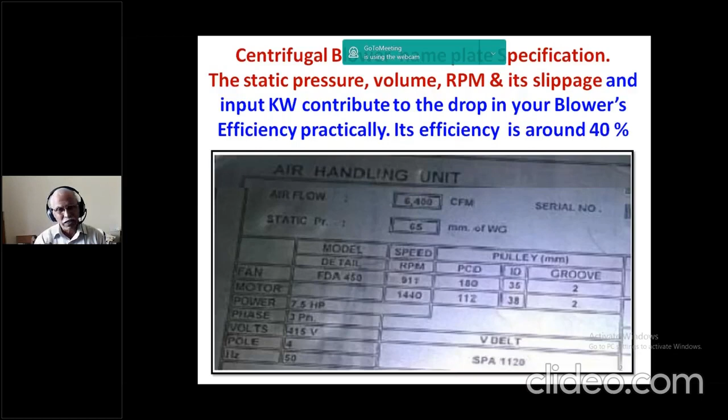This is the study based on Pascal monitoring. Pascal monitoring is related to the RPM of the blower, the Pascal, the flow, the input kilowatt given by the motor, and the fan absorbed kilowatt at the fan shaft. All these aspects will come into it. We will go in depth on this.

So it's a question of revisiting the basics of blowers. Wherever we find the commissioning report, we have commissioned say 20 or 40 fans, let us say in a textile mill or any other industry with dust collection blowers. These dust collection blowers in engineering industries, or in the HVAC segment, we call air washer units or air handling units. Everywhere the blower is the same, but the application is different, so the names are also different. In the HVAC segment, we call it an air handling unit.

If it is the case of maintaining the premises at different RH and temperature, there we call it an air washer unit. And if it is the case of a foundry or an engineering segment, we call it dust collection. The dust in the premises, in the equipment, has to be collected and blown out. So dust collection or automatic waste collection blowers in textile mills or foundries, these are used here.

Let us try to concentrate on a given blower. What does a fan performance curve say, and what does it need? What are the inputs on the x-axis and y-axis of the fan performance curve, especially on static pressure, flow, RPM, and ultimately kilowatt.

The total fan efficiency is ultimately what is deliverable from the fan, in meter cube per second. Let's say it's used in the air circuit only, where air is the medium of flow. The air, in meter cube volume per second, and the total pressure in water column.

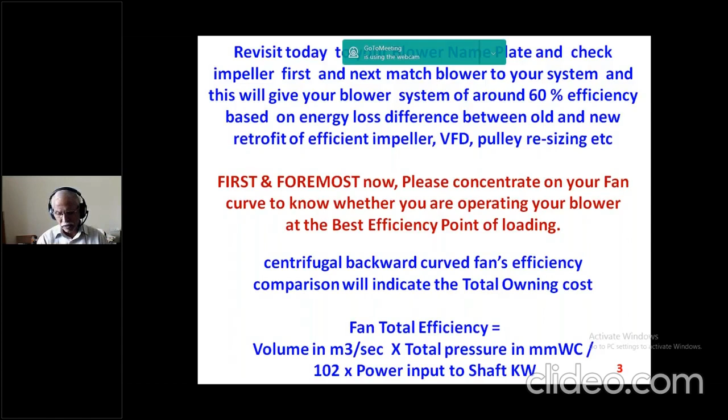A typical 5 HP blower - you can see this Sankey diagram for the given blower. The Sankey diagram is the energy flow diagram for the blower. Input is almost 3.7 kilowatt, that is 5 HP. Motor efficiency is around 90%, drive is around 94%, and the fan is around 70%. Ultimately, 1.5 kilowatt, say almost 2 HP, nearly 40% is lost in the form of heat only.

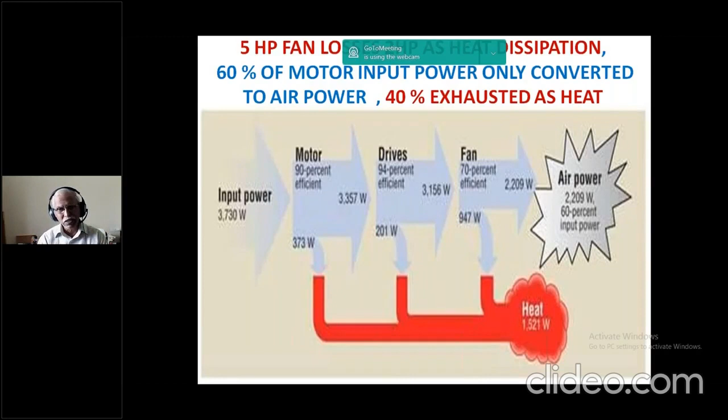When air is being compressed, either in a blower or compressor, the heat of rejection or heat of compression happening during this process is a gray area - whether that waste heat should be recovered, as Dr. Nagesh was discussing regarding waste heat recovery, especially on compressor heat. That's one aspect. But how much we can reduce the waste so as to increase the output of the blower - this is the aspect we are trying to discuss here.

If you take up a breakup of the system, the multiplication of the efficiency of each subsystem gives the total efficiency of the system. Here we find it's a 55 kilowatt textile mill waste collection blower. I'm concentrating on different case studies - it's a waste collection blower.

This waste collection blower is a centrifugal backward curved fan, but the type of blade given in the blower is only flat type. So automatically the efficiency of the impeller itself is around 60% only. VFD efficiency is almost 98%. The motor efficiency at 55 kilowatt is around 90%, and the belt, bearing and pulley here have an 8% loss.

So totally, the system efficiency - we have to concentrate on the system. We have to focus on the system efficiency, which is only at 50%. Now, replacing the existing impeller in the system straight away improved it by 20%.

From a flat profile, we have gone for an inclined profile and curved impeller - centrifugally backward but curved impeller - and it is almost nearer to the airfoil profile, almost 20%. You can see the losses in all the subsystems.

VFD is at 98%, motor at 94%. It's an IE3 motor which gives 94% efficiency at 55 kilowatts.

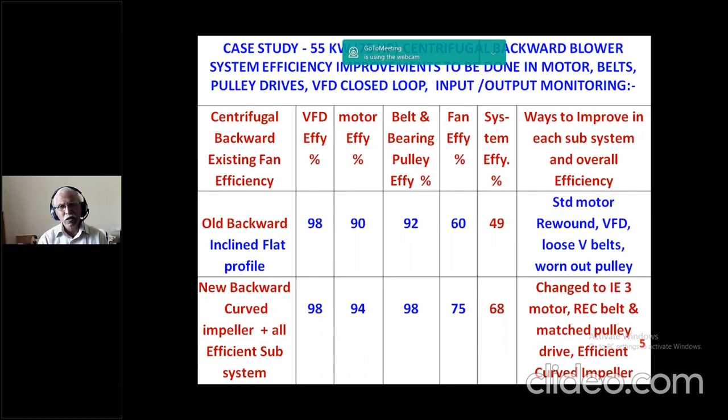This is the area we wanted to concentrate on in the industry. Wherever replacement is needed on existing inefficient subsystems, it has to be done, or a retrofit has to be done, to achieve a better efficiency point on the fan performance curve.

There are two schools of thought here. There's the energy conservation aspect for a given industry - on the existing fan, what can be done? Replacing the impeller, retrofitting a VFD, or improving the resizing of pulleys and belts. These areas can achieve almost 30 to 40% improvement.

Whereas some industries, the green building industries, go straight away for EC fans. The existing retrofit or replacement of subsystems might cost less than a lakh, whereas the EC fan replacement costs more than 4 lakhs. The initial cost is much higher - it is a total replacement.

But here we are not comparing apple to apple. An EC fan, an electronically commutated fan - instead of a 15 kilowatt, 20 HP fan, they will have 4 fans maintaining almost the same output. It's a cascaded efficiency of the fan - 4 sets of EC fans operating as one single fan. That's the new concept coming up.

But typically in India, we always think about what can be done on the existing system to improve it. So the EC fan has, in fact, exposed the energy losses on existing centrifugal fans, and these losses are around 30 to 40%. This can definitely be improved upon, and we will see how efficiency can be restored.

The motor's torque and the load torque - this GD squared value of the given load - has to be optimized and matched to the motor's rating and capacity. This is the crux point in this blower efficiency discussion.

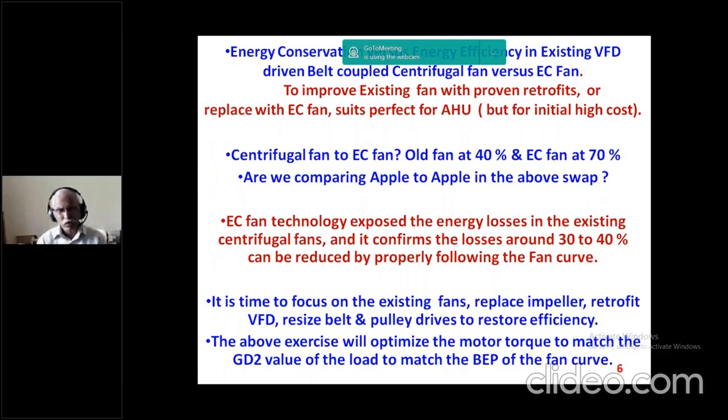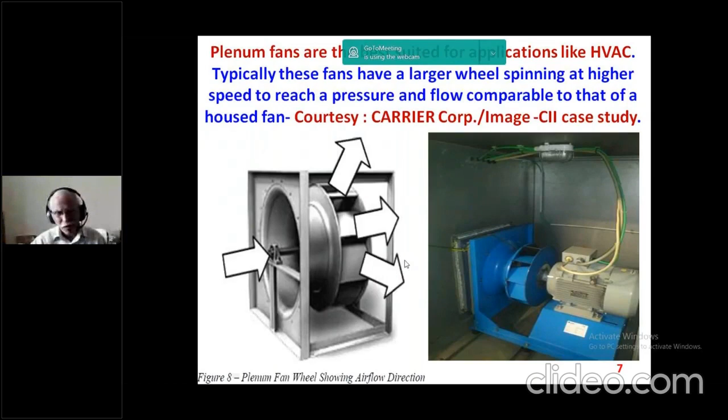You can take the impeller. As I was telling you before, the impeller is an inefficient aspect of the blower building segment, whether it's a forward curved or backward curved fan. If that is replaced - I'm having some video, there's some network issue, I'm just switching off my video, please.

If you replace the existing impeller with a plenum fan or a plug fan, this is an excellent fan - more or less like an airfoil fan, but without the outer casing. It operates excellently at high volume and low pressure, delivering almost excellent efficiency. We will see this in depth.

That is what the CII case study, or the Carrier Corporation, says. We can replace the existing blower with this plug fan or plenum fan, and automatically you can see an efficiency improvement of more than 20%.

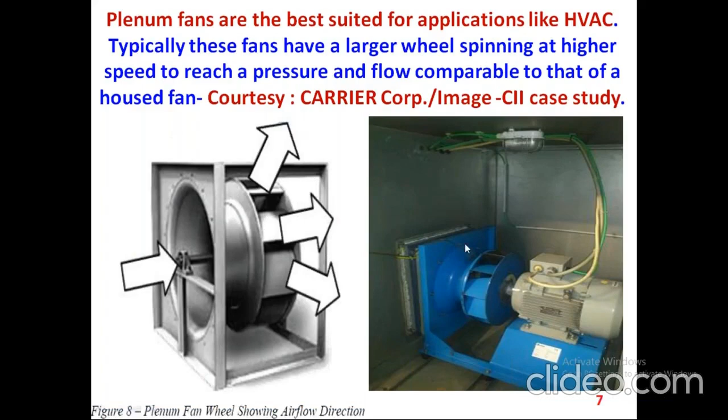Thanks to this Carrier air conditioning case study. This is a fan delivering 25,000 CFM at almost 5 inches of water column, almost 125 mm of water column, 1250 pascals. That is the deliverable pascal from the fan as such.

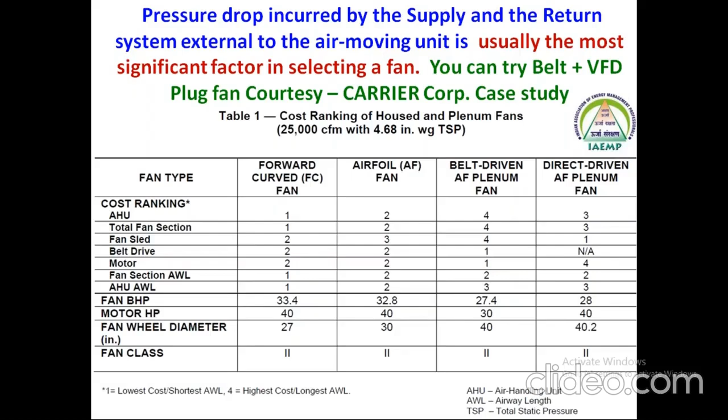The motor HP wanted for this application: normally all the fans want 40 HP except the belt driven plenum fan which needs only 30 HP. So straight away you can save on the inventory, you can save on the motor capacity, you can save on the switchgear capacities. Ultimately, the rated capacity may be 40 HP, but the running BHP is only around 27. This much of energy saving is possible. We can try this on this VFD coupled plug fan study, and definitely this can give almost this much of savings.

To identify the savings and to monitor the savings, to achieve the savings, we have to monitor this. In any waste collection plant, industries have become very much active now, especially on the monitoring. They are collecting this LED based 1 foot by 1 foot display placed at a height of 14 feet.

The whole department can monitor what is the Pascal. This is on a textile mill waste collection system. They are able to see on the header what it is - it is almost 1000 Pascal. And what is required at the machine end is only 600 Pascal. So how much saving can be done here?

So digitally, in situ measurement can be fixed like this type of header monitoring, or with a portable kit - this testo type or any branded portable meters are available. It can measure in terms of Pascal, and you can say what Pascal you are monitoring at this fan, at this capacity. Coming to the static dynamic pressure in the piping, this is the main point apart from the flow we are discussing.

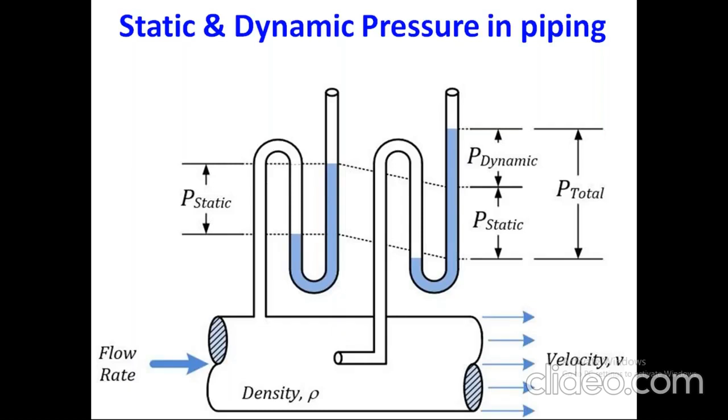This Pascal is more important not only in engineering industry or textile industry or any other industry, but it is very much important in the HVAC industry. Because of this COVID situation, the indoor air quality is more important, more critical now. If the blower is getting choked - that is, the HEPA filters, high efficiency particulate filters used in the blowers are getting choked - automatically you will find so much pressure drop will happen across the blower.

The pressure drop, the pressure will build up across the blower, meaning automatically the flow comes down. So the monitoring of pressure across the HEPA filters, across the filters in the blower, is more important to achieve better changes within the air conditioned premises.

If the blower is not pumping air at the required static pressure, straight away the staleness or the air sickness comes in, and automatically the IAQ of the given department - the CO2 monitoring we are maintaining around 900 to 1000 ppm - that definitely comes to a problem, that definitely shoots up. So ultimately, the static pressure of a given blower is more important in the HVAC segment as well. That is to be monitored as such.

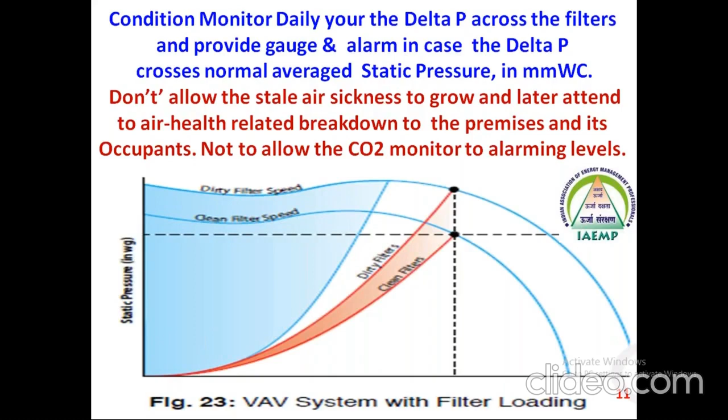I am just trying to share existing case studies where we have done almost hundreds of audits in the building segments and the industry segments.

This is a fresh air fan duct kept on the open terrace of a building, a hospital building. You find so much blockage in the HEPA filters. Ultimately the airflow is being sucked by the fan. The suction pressure or vacuum pressure measured by the fan is only the static pressure in Pascal, and that will be dropped. What is there in the atmosphere is not able to be sucked by the fan because the filters are all choked.

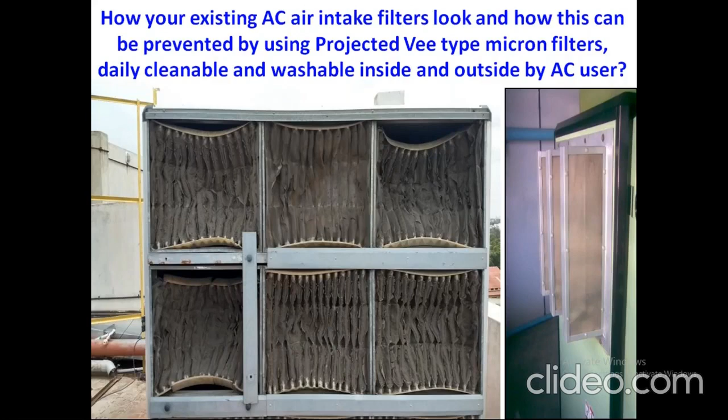This is where we suggest to the industry or building segments to go for a pre-filter, daily cleanable and washable, with an SS Netlan type pre-filter and a PU type mesh filter to clean ahead of the existing HEPA filter. It has to be maintained daily. As long as you maintain the pre-filters daily, the internal conditioned premises' RH, temperature and air changes, and the internal air quality will be well within the normal limits and norms.

Technically speaking, the fan performance curve shows the system curve with the system effect. The OEM gives a fan curve with a system curve which shows what is designed and what is calculated.

What is calculated is that at almost 10 inches of water column, we get almost 14,000 CFM. But when the system resistance or static pressure increases due to narrowed ducts running from the main air conditioning chiller and blower to the end of the conditioned premises, the static pressure increases. Instead of 14,000 CFM, it can deliver only 12,000 CFM at 14 inches water column. So this drop from 10 to 14 inches is because of the static pressure drop across the filters.

This is an area which can be handled with IoT monitoring also. Thanks to Sunil Chhatre, he has given an excellent macro view of IoT, showing wherever it can be embedded in existing systems, either in hospitals or hospitality segments like hotels. These devices can prompt the user, the manager, or the energy manager to take immediate action instead of waiting for a breakdown, so he can take corrective action immediately.

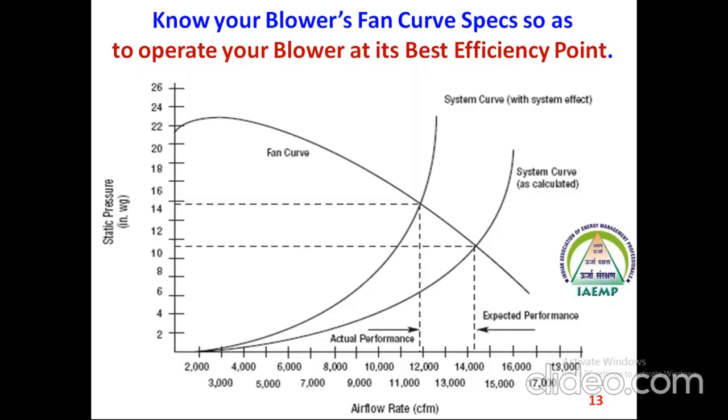Coming to the Pascal discussion, it's a slightly deviated topic, but still important. Charity begins at home, and likewise conservation, or LPG conservation, also begins at home. This Pascal monitoring, especially in industries, can give straight away 20 to 30% savings on variable torque loads, and this is possible at home too.

This static monitoring can even be done in your college kitchen. You take a T connection from your LPG cylinder, and into that T connection you insert a Pascal gauge. Normally, after the regulator, the LPG is supplied at around 280 mm of water column pressure before it gets pre-mixed with air and goes for flame. I'm talking about the domestic LPG cylinder here.

This pressure is not fixed or steady. When the cylinder is full, it almost goes to 3000-plus Pascal, and when the cylinder goes empty, the liquefied petroleum gas vapor pressure automatically drops to around 2200.

Thanks to this retrofit device, I went for a two-stage regulator. What we do at home can automatically be done in colleges or in industry too — energy conservation begins at home only. I did this about 7 years back. The government gives an annual subsidy quota of almost 12 cylinders, but I have been maintaining with only 6 cylinders since 2014.

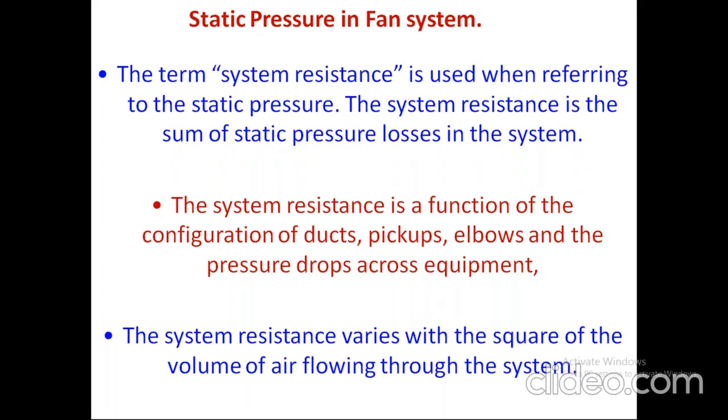For existing centrifugal type fans, what energy conservation measures can be done? Choosing the right type of impeller for the given fan. When you go to the industry for energy audit, tell the industry to open the cover to see what type of impeller it is, how it is made, what is the MOC, the material of construction, whether it is centrifugal backward, forward curved, radial type, propeller type, or aerofoil type impeller. All these inputs will definitely show where is the scope for energy saving.

Then reducing the system resistance. In many textile mills, instead of the T&D losses I was telling in the previous session - the transmission and distribution losses - whatever is generated in the air conditioning humidification plant is not delivered at the end point because the duct loss is more. Many air conditioning humidification plant vendors improved the ducts - instead of an ordinary GI duct, they went for an FRP duct, a circular type duct at a bigger size. Automatically the system resistance dropped down from end to end, and this also improved the total system efficiency.

So we are trying to operate the blower or the axial flow fan - the purpose is the same, though the direction may be different. The axial flow fan also follows the centrifugal aspects of the fan affinity laws, with a dead band. That is okay.

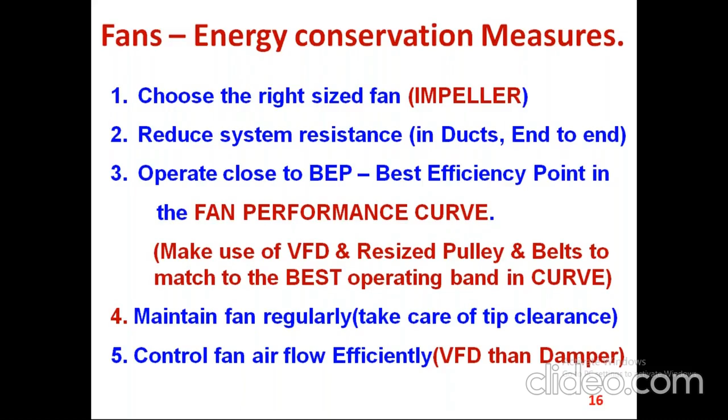So instead of a damper effect, damper is the least efficient, whereas a VFD is the best efficient. Coming to the impellers, backward curved impeller is almost 79% efficient, whereas a radial impeller is 69%. Many exhaust fans use this radial type.

Forward curved fans were used in some HVAC installations before. I'm talking about 10 years back, many old buildings used these forward curved fans, which are at 60% efficiency. If they replace with airfoil blade, especially in the HVAC segment, they can straight away save around 20% just by changing the impeller.

Bureau of Energy Efficiency gives a lot of inputs not only to energy managers and auditors through their guidebooks and refresher materials. These are all points we have to see in the industry, and we have to educate the industry. It's reverse education to the industry, since the industry is always vendor centric and always listens to the OEM. But as an energy auditor, we can also give our inputs to improve the health of the machines in the industry, which ultimately means energy saving for the industry.

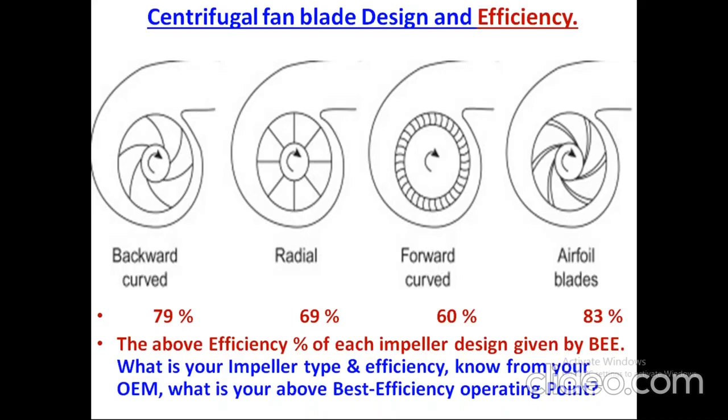Coming to variable torque loads, RPM measurement is very critical, especially for all blowers and centrifugal pumps, whether it's a centrifugal blower or an axial flow fan. At 90% of RPM, say a 1500 RPM fan with a 4-pole motor, if I operate at 1350 RPM, which is 90%, I am able to achieve savings of almost 27%.

The power reduction is 27%, so that energy saving is possible. A 2% reduction of motor speed, subject to the optimum static pressure and flow required by the load end, gives 6% power savings, and a 5% reduction in motor speed gives straight away 14% savings. So VFD coupled with resizing of pulleys definitely increases energy savings. VFD alone can achieve let's say 70% of the possible savings. The balance 30% can be achieved by resizing pulleys and belts, so totally 100% energy savings is possible. Meaning, of that 30%, 100% can be achieved by VFD and pulley resizing combined, whereas with only VFD, only 20% of that 30% is possible.

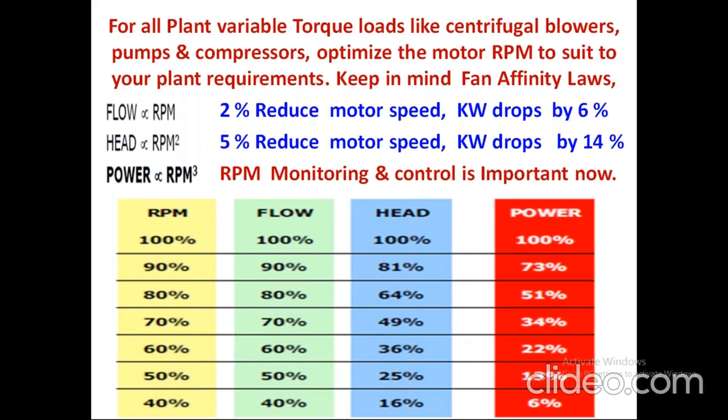It is purely by the resizing of the pulleys and the VFD; the flexibility and versatility of the VFD is put to use in this application, and straight away 35% savings is achieved. It is a critical application, they have to maintain temperature and RH at 22 degrees, especially since it's a chocolate factory where you cannot risk the air changes. But having taken this study, they have been running this for the past 3 years at 35% energy savings, and the factory is still running with air circulation achieved.

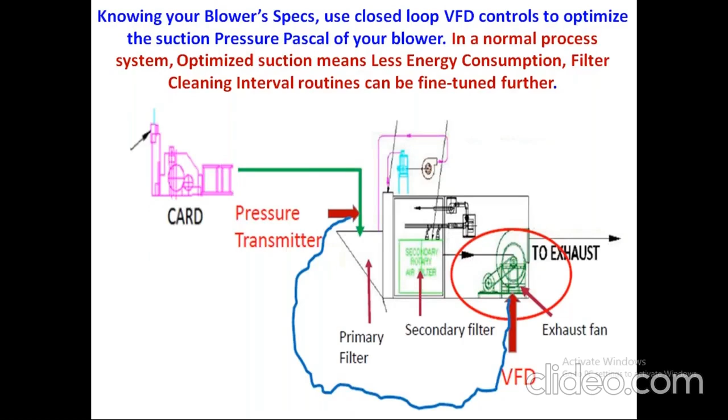How can this be corrected? I'll show you, thanks to this BEE knowledge transfer platform in textile mills, some big textile group has shared this case study. Normally we find the negative pressure required by the machine - the supplier says 600 Pascal, whereas the duct loss here is 600 Pascals more. That is why we always say optimize your duct sizes, make the duct sizes smaller, and reduce all the bends and sharp bends to reduce the Pascal losses. The compressed air kg loss from 6 bar to 7 bar is seen, but the Pascal loss from 600 to 700 or 800 Pascal is not seen by the individual.

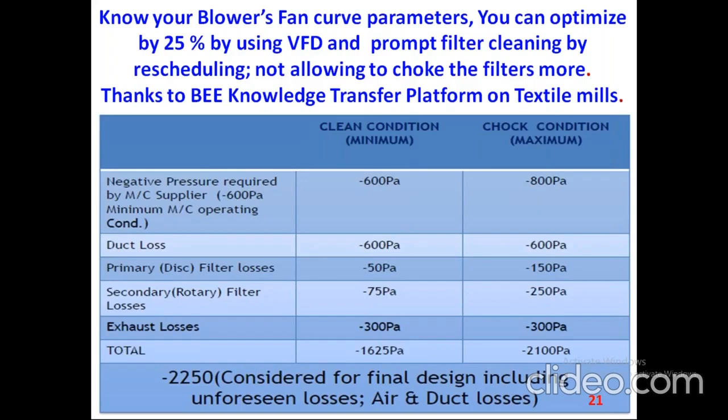This is where we have to monitor the Pascal to maintain this, and we can maintain the same blower instead of 2200 Pascal at 1600 Pascal also. From 2200 to 1600 is straight away 25% possible saving in existing waste collection systems, not only in textile mills but also in foundries on the fume extraction point, and in all the dust collection blowers, especially used in fettling aspects in foundries and engineering segments. This can be achieved as such.

So why is this VFD put to a blower? When the blower is put to recirculation, straight away 100% is the consumption - there is no energy saving here. Whereas if the blower is throttled by a damper control at the delivery of the blower, 70% consumption is there. If it is put on cycle control, switching on and off, that is the best way of control, what we do in our domestic fridge.

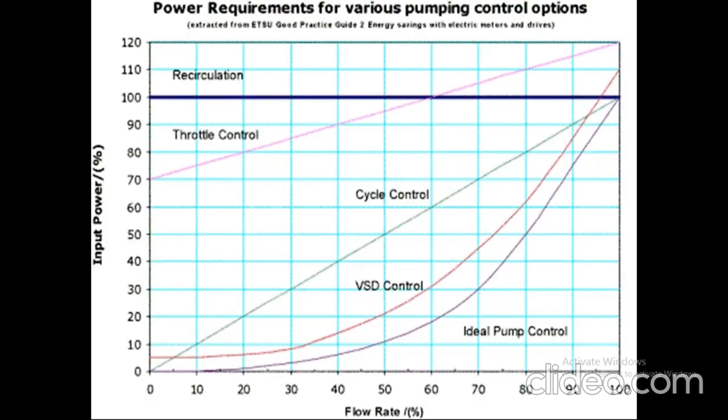This is where also now the inverter type VFD has come for the fridge compressor also. Instead of switching on and off on the thermostat, this inverter still reduces the kilowatt or watt savings in our domestic fridges. Likewise, with cycle control, the VFD control, the variable speed drive, consumes only 10% at the starting of flow rate. Even at 50% of flow rate, this consumes only 20% of input power. At 80% of flow rate, this consumes only 50%. This is the main purpose of putting the VFD on the blower. Wherever, whichever industry has not put it, you immediately put the VFD, and you can achieve savings based on the Pascal requirement and based on the flow requirement from the load end.

Coming to the impeller, what I have been talking about before is centrifugal impellers. This is an axial flow fan impeller. Many textile mills are implementing this. The previous impeller was a gravity die-cast fan blade, which was almost 35 to 40 kgs. This impeller is 1200 mm diameter. This is replaced - instead of an 8 leaf, this is replaced with 18 leaf. Higher the blades, better is the CFM and better is the static pressure. It is a pressure die-casted impeller, replacing the previous one. Straight away, textile mills are saving around 15 to 20% by this swap.

In some textile mills where the plenum size is less, they can go for an aerofoil type FRP blade, where it is not a hollow FRP, it is a thick FRP. Normally, it is glass reinforced FRP - the glass reinforcement will definitely increase the weight of the fan, but the aerofoil profile of the fan will achieve excellent savings, almost 15 to 20% achievable. But the problem with textile mills and OEMs is they measure only the flow. If you measure the static pressure, are you maintaining the same 30,000 CFM at 600 Pascal before and after? If you are able to measure the Pascal before and after, then you are 100% convinced you are getting the energy savings achieved. So kindly confirm this, please.

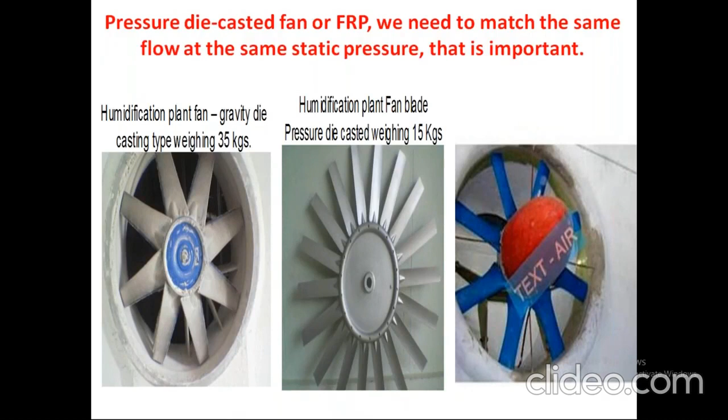Normally, in some industries, like a booster fan, they have two fans in series where high resistance is there, which induces high resistance, and if you want to increase the flow, the static pressure automatically increases when two fans are in series. But in many industrial applications, like exhaust, suction, or air washers, they have parallel fans where the system resistance is low, and two fans in parallel can give an excellent CFM at a very low static pressure.

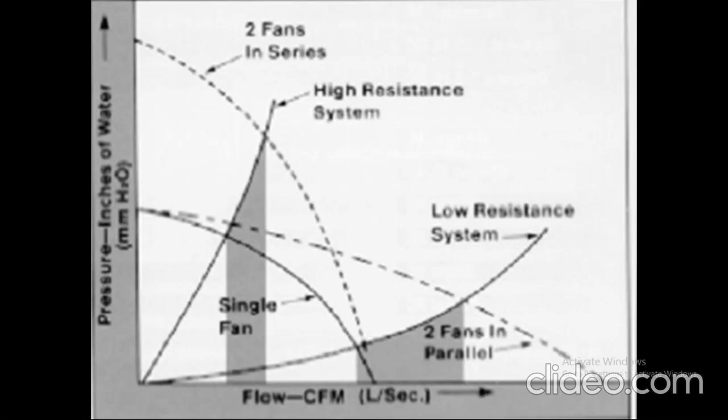Normally, for two fans in series, out of 10 industries maybe only 2 industries need this type of setup, fans in series. But most industries, 7 out of 10, need fans in parallel only.

We can see exactly the opposite, where the fan curve shows the high resistance is not there. So the low resistance of the system improves the operating point of the existing two fans, and ultimately parallel fans are suited to all industries where airflow changes or air changes have to be achieved. In many textile mills, they go for 2, 3, or 4 fans in parallel to achieve this.

Fan performance curve - if you have not taken this from the industry, as an energy auditor you go to the fan performance curve, or you suggest to the industry: whatever fan the industry has bought, don't buy this fan as a commodity, buy the fan performance curve.

This will show the absorbed power of the fan in the top graph, and the static pressure, the mating point or meeting point of static pressure, maximizing the flow and the pressure for the given kilowatt. This is the best efficiency point of the given fan.

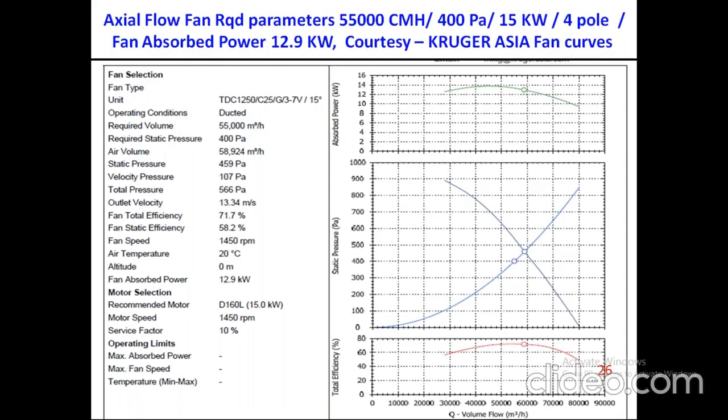You can see the specifications of the fan, it has to be defined. Any OEM, the fan OEM, is supposed to give this fan performance curve to the industry. It is part and parcel of their spec to be delivered to the industry. It is not just a question of delivering the fan, but they have to deliver the fan as well as the fan performance spec to the industry.

That is the aspect of blowers - condition monitoring of blowers, and especially Pascal monitoring of blowers. Energy monitoring in blowers is the last aspect of this. Now let us come to the compressor.

For the compressor also - what is the pressure to be maintained? What is the pressure demanded by the user? What is the pressure demanded at the header? What is the pressure maintained at the generation?

So any air that is compressed contains so much water due to the RH in the premises - say in Nagpur or Ichalkaranji, or in coastal areas, almost 95% RH. Whatever the RH is, it's around 70%, and at night time it's around 90%. The RH is a variable factor, as well as the temperature factor.

So when air is compressed through an air compressor, the water has to be removed in stages. If the water is not removed, it will kill the pneumatic health of the given process. The pneumatic functions will malfunction because of water ingress into the air system. So we have to remove water in the post air cooler, in the air receiver, across the filters - the coalescing filters or water separator filters - and then in the refrigerant dryer. With all these aspects, the water is removed, and the pneumatic health of the system will be excellent for a given industry.

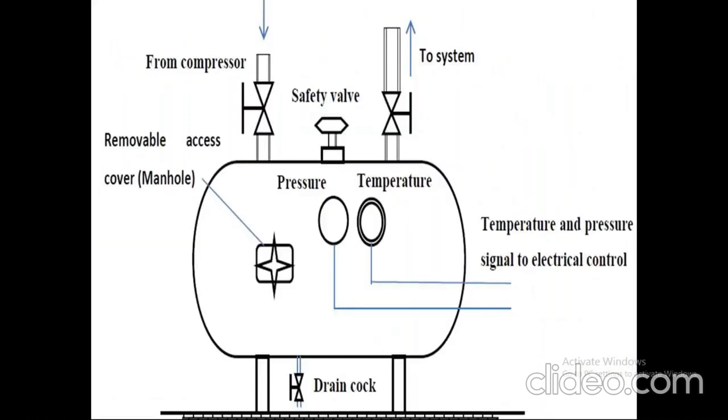And the pressure has to be maintained in the receiver, and being a volume, we are using this. Many of the laws like Charles' law or Boyle's law, P1V1 equals P2V2, for a given PV equals RT. All these gas equation inputs we are using here.

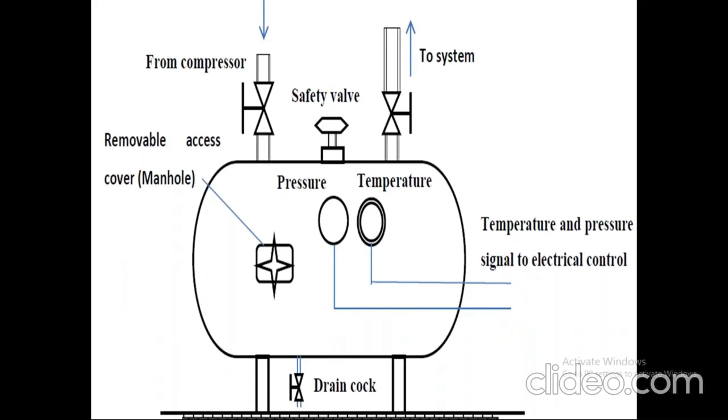Once the volume is expanded for the given pressure from 7 bar, it is given to some 1000 liter or 2000 liter receiver, straight away the pressure gets stabilized within a few seconds. We want a non-pulsating, not a pulsating pressure to be given to the process. We don't want a pulsating pressure to be given to the process.

Thanks to the thermal imager. The thermal imager is a non-invasive portable device where it can study all the aspects. It is not meant only for an electrical room or a powerhouse. It can be very much used in all your process flow, wherever the temperature gradient is changing, there it can be applied.

The level of emissivity is auto-controlled in a thermal imager. In a basic thermal imager, it is getting controlled, and you can measure the temperature of the in and out of any systems.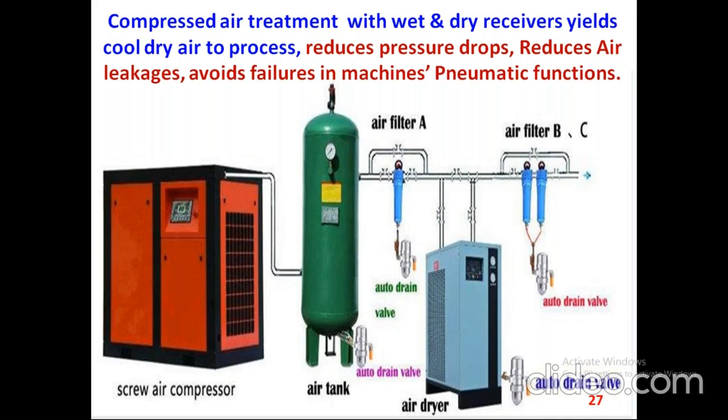Any dryer for the given process, as I was telling you, this is the dryer it is used. It's a 1000 CFM compressor, meaning the dryer minimum those days, one decade back, they were using a 1000 CFM dryer. But now the pressure drop across the dryer is going more, so they are going for a 1300 CFM dryer.

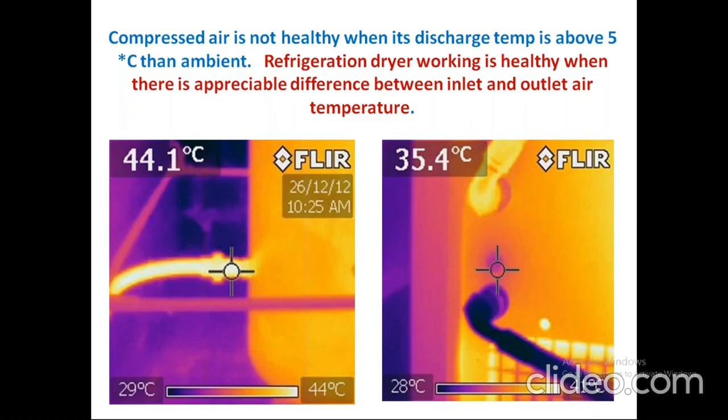Why this 1300 CFM dryer is needed: when the temperature of the air inlet from the receiver to the dryer goes to 44 degrees, straight away the dryer gets derated by 10 to 20%. So that is why we say the air delivery temperature after the post air cooler should be less than 5 degrees above the ambient temperature across the compressor house.

Here the ambient temperature, the house temperature, everything matters to the compressed air flow. Compared to any variable or flow in the process or utility in the industry, compressed air is a dynamic variable where it is fluctuating very heavily.

Normally the compressor OEM says, I am giving a 160 kilowatt machine, it is a 1000 CFM deliverable at that pressure. And the FAD, the free air delivery at the nameplate of the compressor OEM, is stated either in meter cube per minute or in LPS, liters per second of the compressed air. This is following the standard IS 1217.

I will suggest all of us visit the IS 1217 standards to see what ambient condition, what reference they are taking, and what deliverable air reference point they have taken as an OEM. They have taken the deliverable at a temperature of 20 degrees and at a relative humidity of 0.

This is not going to happen anytime, but this is the reference point the compressor OEMs give on their nameplate, say at 160 kilowatt meaning 1000 CFM.

Let us apply, thanks to the best practices, we have to visit the global energy management websites. Lots of inputs are available to the industry, to the academics, to the professors, and you will find many of the inputs can definitely be horizontally deployed to the industry, where the tropicalized condition for an Indian climate can be addressed by the changes happening in the ambient, and that can be corrected.

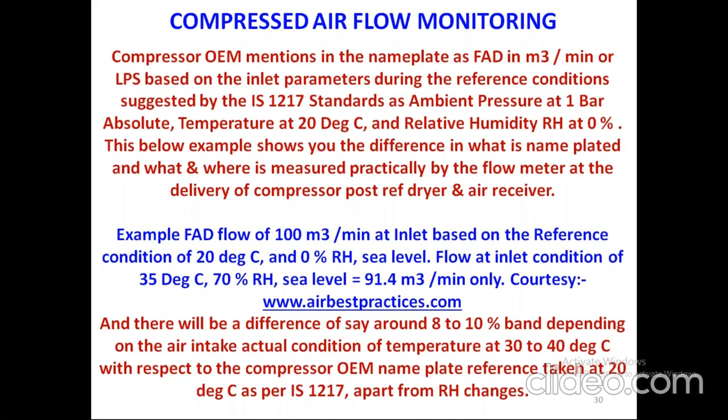So in the compressor, energy monitoring can happen at the generation, at the distribution, or at the tail end. So arresting the leakage is important, because this leakage is not visible. And to make it more visible, the leakage can become audible to our human ears.

Let us say it is a 2-inch pipe with 100 CFM air flowing through it, and it is leaking more than 30 CFM, let's say 30% and above of air leaking on that 100 CFM line. This is audible to our ears. Any airflow or piping flow leak above 30%, above 33%, is audible to the ears. That is our human ears' capacity.

But we cannot rely on our human ears' capacity. We have to go for an ultrasonic imager to arrest the leakages where it is happening minutely. Small drops make a big ocean. What all the EESL, TERI, CII, and everyone talks about is compressed air leakage only. We have to go for ultrasonic imaging to spot the leak hotspots, and that has to be arrested.

You may have an excellent generation compressor which gives almost 0.15 kilowatt per CFM, but still, if you are leaking through the pipes and equipment, it is a big loss to the industry. It is a silent loss to the industry.

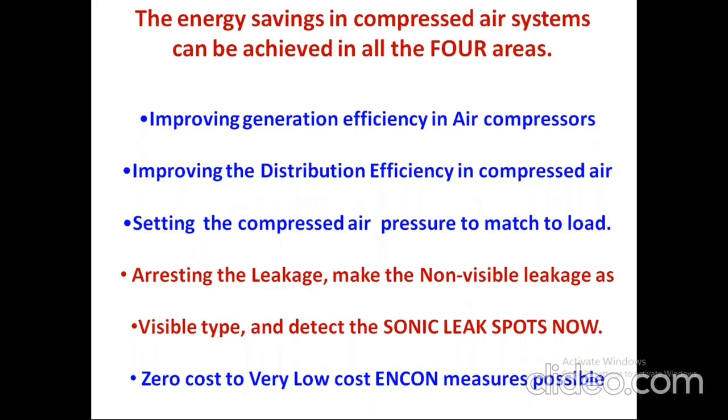Coming to the piping, wherever you find T connection pipings, it creates turbulence. Normally the compressed air velocity is supposed to be maintained around 6 to 10 meters per second in the compressed air header.

In the distribution, it is different, around 15 meters per second, it can come more also. But for many of your compressors on the compressed air header, I will suggest you go for a compressed air flow meter to monitor the velocity, to know what velocity is there.

Because all the GIS pipes, all the MS ERW pipes, electric resistance welding ERW pipes, get totally corroded and scaled inside. Instead of a 4-inch pipe, you will effectively have only a 3-inch pipe inside. Automatically the velocity will go up, and ultimately the distribution loss will definitely increase, and the pressure drop across end to end will definitely increase.

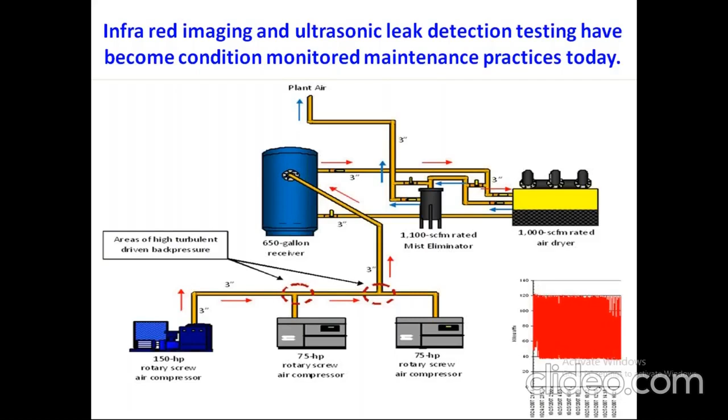Wherever you find a T connection, that is a point of turbulence. In many industries, they have replaced their T joints in the compressor house with conjoining joints. I'll just show you the conjoining joint - this is on the water pipe, but the same thing can be done on an air pipe also. They have to go for 45 degree conjoining bends on the compressed air header. Straight away, it can give a minimum of 5 to 10% savings depending on the turbulence happening at the T joints in the compressor house.

Ultimately, a 100 kilowatt compressor running means only 15% is made useful to the process, and in that process only 10% of the input actually reaches the point of pneumatic amplification, the real pneumatic functioning. So the T&D losses and leakages vary around 30%.

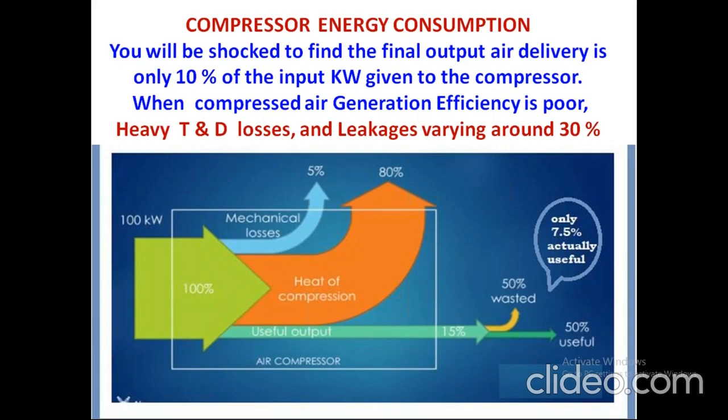It varies from industry to industry. In a textile mill, it is 30%. In the loom sector, airjet looms and other machines, it is around 5 to 10% only. The leakage figure cannot be generalized. Normally energy auditors generalize and say compressed air leakage will be 30% or 50%, but it is not like that. In many industries, they maintain less than 10%. This is a point to note for the energy auditor.

Because of leakages in the compressed air header, on the piping, and on the branch piping at the tail end, this compressor operates from 170 kilowatt to 340 kilowatts. It's a 325 kilowatt machine giving 2000 CFM delivery. Because of the leakage happening in the system, and since they don't have a cleaning air receiver, you can see the pulsations. This automatically affects the electrical distribution and is a big loss to the industry. They cannot afford to have a zigzag flow rate in the compressor; they have to stabilize the pulsations.

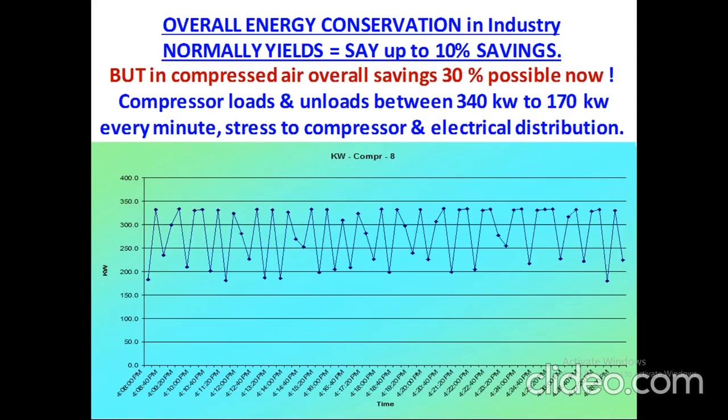We always call it the quarter decay rate. Normally it is a theorem by itself - you go by the quarter decay. Initially it will start with 4 times the amplitude, then it will come down to quarter decay. This quarter decay and non-pulsation condition is mandatory for the given process or industry.

That is why we always suggest, when you go to an industry, to go for 2 types of receiver - called wet receiver or dry receiver, or demand receiver and control receiver. The control receiver controls the cut-in cut-out for the compressor, whereas the demand receiver takes care of the process. This is mandatory, as per the air best practices guidelines. The compressor OEM always suggests you don't go for 2 receivers, to keep compressor efficiency looking excellent, but they find a loophole by recommending only a single receiver at the compressor house. It is a loss to the industry - you definitely need 2 receivers.

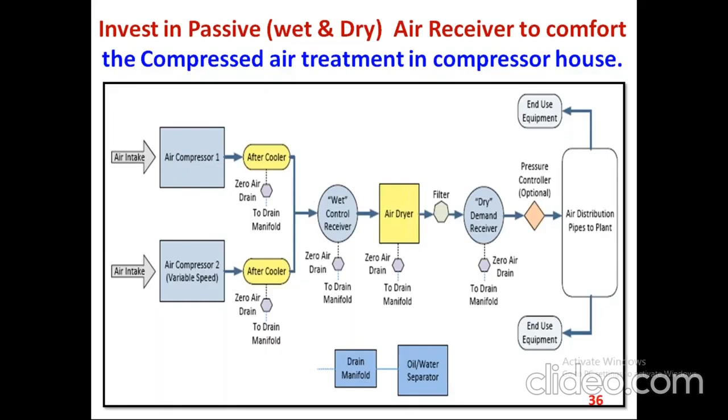That is why I have been discussing monitoring of compressor receiver temperature, water drain at the receiver, load-unload hours, and refrigerator air inlet and outlet temperature. What is ambient temperature? Plus 5 degrees, and ambient temperature minus 5 degrees is the output of the dryer. For pressure drops, you have pressure switches or a pressure gauge and indicator.

Thanks to IoT, incorporate IoT devices end to end on the main header and on the tail ends where heavy withdrawal occurs. When there is a heavy drop of pressure, it means there is unwanted leakage happening, which can then be corrected.

Thermal imaging of piping and compressor parts is excellent, and sonic imaging of air leakage in pipes and tube joints is useful too. At any machine control panel, these pneumatic junction joints have lots of leakages because of bleed valves, non-bleed valves, electro-type valves, and poppet type valves. The leakages are more in the machines than in the header or subheader - you have to look into that, and this is possible only by sonic imaging.

An ultrasonic imager is available; you can use that. It ranges from 50,000 rupees to almost 15 lakhs. Depending on your requirement, you can choose the imager.

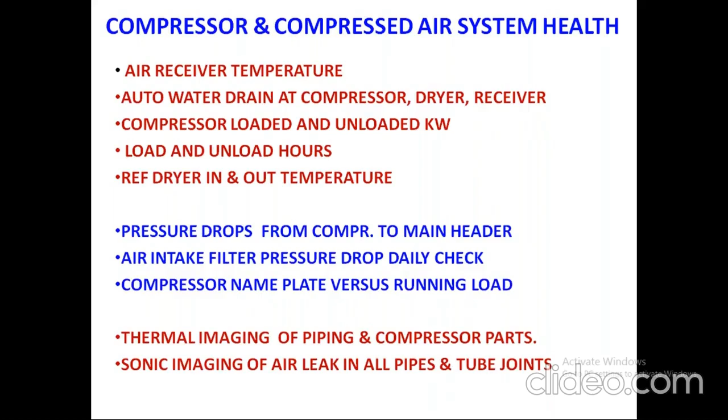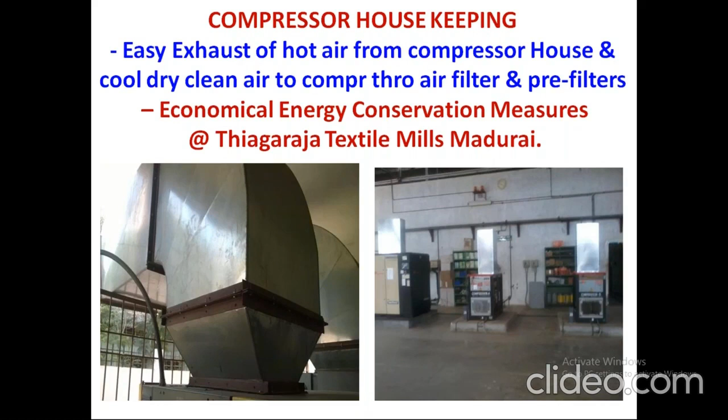What is the reason for heat rejection? As I mentioned before, 70% of the heat is rejected and has to be evacuated out of the compressor house. Where you are doing the energy audit, suggest going for a 3-meter duct on top of the compressor skid. Automatically the hot air is taken to the top, and the compressor's surroundings are kept cool. Some just-in-time measures have to be implemented in the industry's utility to improve energy conservation and efficiency.

Pascal monitoring is possible in each and every compressor. If the energy auditor has not done that, let us do it now. The Pascal meter costs just less than 10,000 rupees. Have that Pascal meter and digitize the Pascal drop, the pressure drop across the filters.

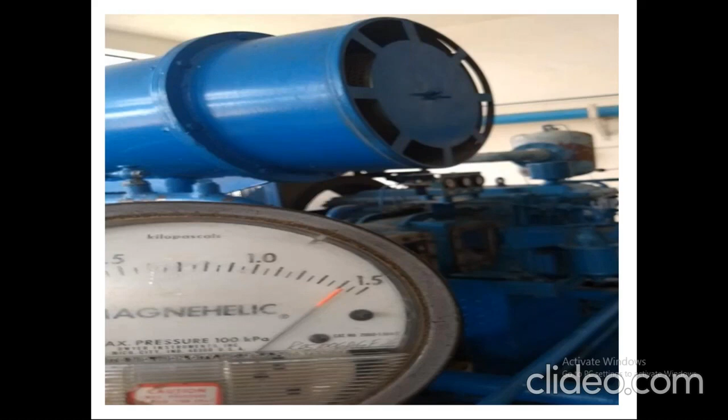This is a BOP compressor, a Kirloskar machine, a balanced opposed piston compressor. Almost 1,500 Pascal is the drop. Normally a new filter has a drop of only 300 Pascal, and here it is 5 times the drop seen in the compressor - this is automatically a loss to the compressor.

That is why one is monitoring the loss across the filter and suggesting the industry go for a V-type filter, 30 degrees V-type filter, so that you can increase the area of coverage of the intake, and you will have a PU mesh to reduce particulate matter in the air. Ultimately, this is daily washable and cleanable in the industry.

And the existing main filter, that is a paper filter, it can run for 3,000 hours. Instead of 3,000 Pascal as the pressure drop, you can maintain less than 1,000 Pascal at the main filter.

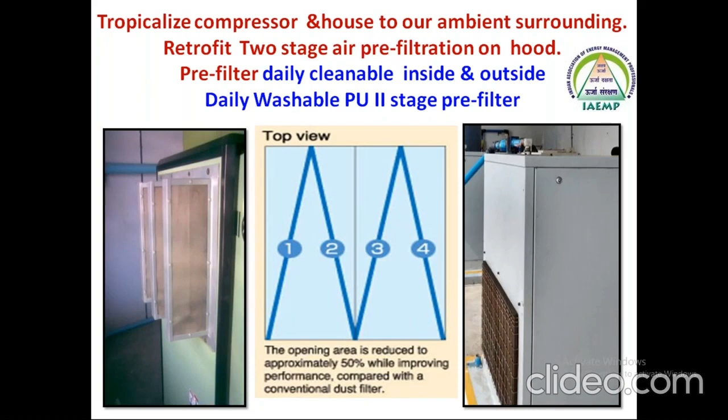Having done the energy audit, we always suggest to the industry, and this industry has done that, they have maintained an excellent V-type filter, pre-filter, and a PU filter inside the hood.

See the shift, this is GHCL, Gujarat Heavy Chemical, the ACC unit in Madurai, they have done this. Every shift the operator just cleans that pre-filter. He sees to it that free air is delivered at the compressor intake always, throughout the period of 10 years.

Pascal measurement - thanks to our Dr. Sanjay, he was mentioning we wanted more inputs on the Pascal. 1 Pascal in 1 lakh Pascal - this is what the compressor gauge shows. It's an imported machine, and this compressor sees the air filter drop around 600 or 700 Pascal only, but it's displayed on a 1 lakh Pascal resolution. So automatically you see only many zeros in the resolution, and ultimately the operator assumes it is perfect.

So try to have a retrofit fitted. Now, thanks to our energy audit, I always suggest to the industry - we have some IoT implementing service providers there. Once we suggested to them, he said, sir, it is available at a cost of less than 10K only. We can provide that air intake delta P filter with a remote alarm at a cost of less than 10,000 only. And this prompts the compressor user to stay within the limit of less than 1000 Pascal, and not allow the choke to go more than 3000 Pascal.

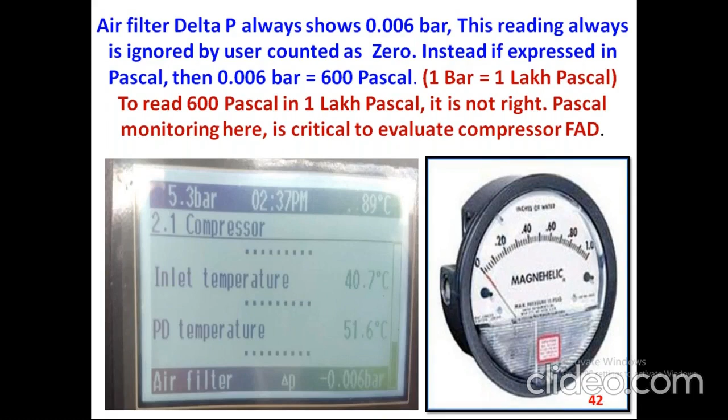We will not go only by the OEM's instructions. We will also aim to be better than the OEM's instructions.

This is our energy auditor's section - this imported machine where the air intake Pascal is not given focus at all. We can see a small vacuum bulb to check if it's choked. We removed that filter and inserted our digital Pascal gauge and measured the Pascal. So instead of that, you put a connection, an impulse connection, and take it outside the hood, and then just leave it like that.

This IoT device will show the compressor is healthy daily - this is what is wanted now. This is a 160 kilowatt machine, and here the Pascal is not monitored, meaning it is a loss to the system. Aggregated loss and aggregated aging to the compressor can happen only because of a starved intake at the air intake.

The compressor usage and leakage - see, normal production needs only 50%, but almost 30% goes towards leaks and 10% towards inappropriate uses. So leakage is a primary focus, not only for the energy auditor.

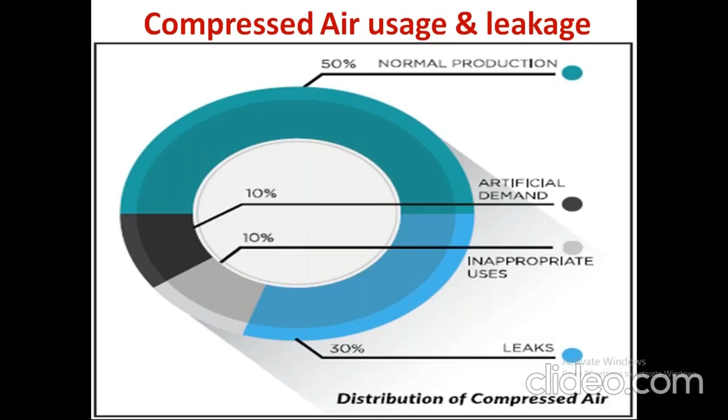It is normally we suggest the industry to outsource the air leakage detection. An outsourced service provider agency will do a better job of finding the total leakage and giving the corrections, and then we can maintain it ourselves.

A 1/8 inch leak, which is about a 3 mm leak, costs almost 2.4 lakhs per year. This is what we have to focus the industry on. In one industry in Madhya Pradesh, they shared that they put a blackboard at the compressor user point saying, we are losing around 10,000 rupees per day because of compressed air leak. This is input to the user to see that leaks are not there and are arrested, because the air gets silently drained out.

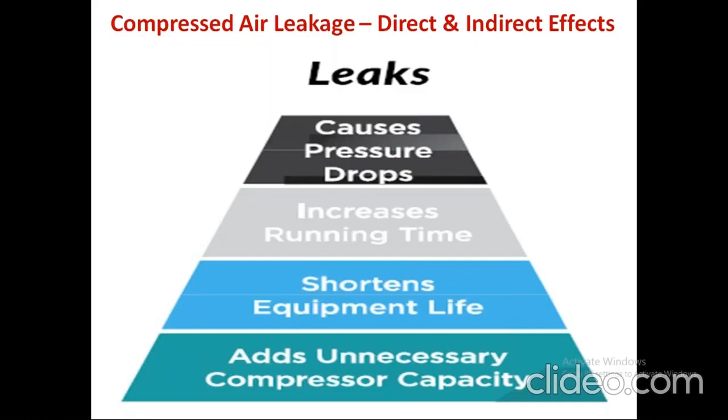Leaks can cause pressure drops in the compressed air header and increase the running time of the compressor, or it can shorten the equipment life. In one industry we visited, instead of a 22 kilowatt machine, they had two 22 kilowatt 30 HP machines and the leakage was more than 40%. The management was going for a third 30 HP machine to run three machines, with 30 to 40% going to leaks only. Had they arrested the leaks, the payback would be within 3 or 4 months, and they could have avoided buying one more compressor entirely.

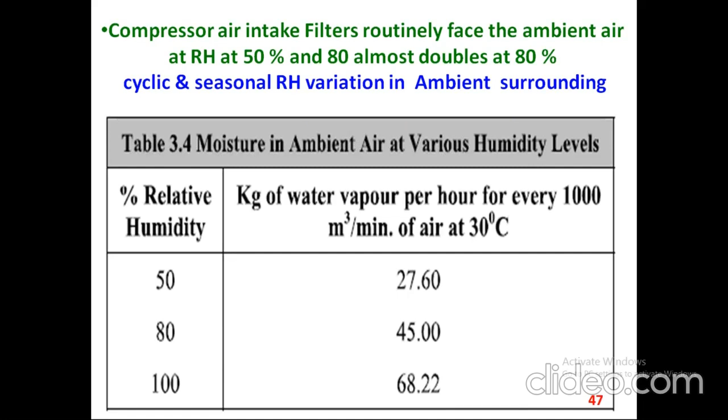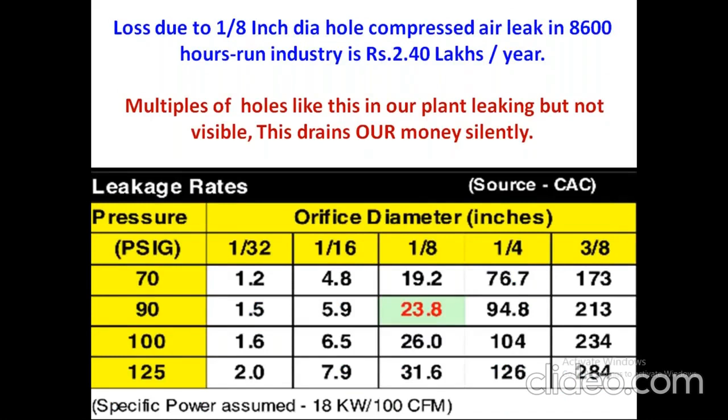Coming to the cleaning aspects: a 6 mm hole leakage straight away goes to 104 CFM. You can see a quarter inch, this 6 mm hole, almost 104 CFM is getting lost. Whereas in the case of a 10 feet roll or a 3 meter roll, you will find only 27 CFM is delivered at the tail point. And if you put a transvector nozzle, instead of 27 CFM, it consumes only 19 CFM. 60% energy saving is possible by going for these energy efficient nozzles.

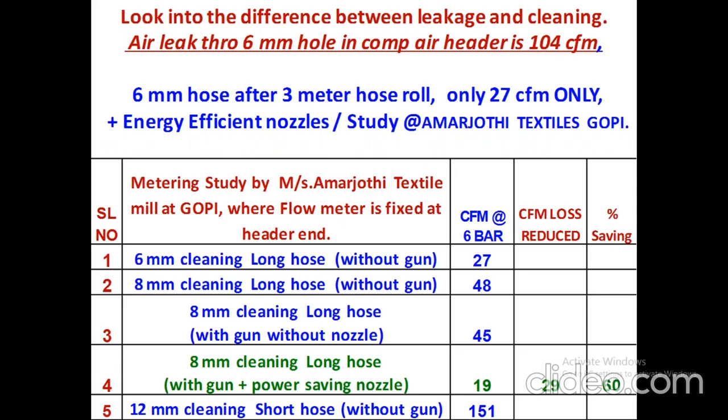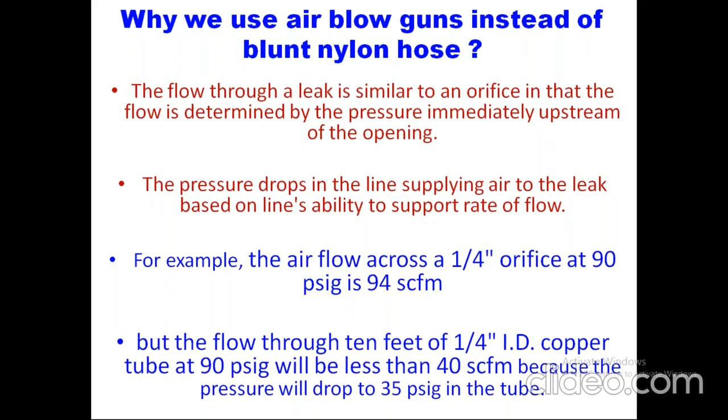We always find the industry using a blunt nylon hose. The blunt nylon hose airflow across a quarter inch orifice itself is around 100 CFM. You'll be running a 20 HP compressor just for cleaning of a machine. Instead, if you go for this transvector nozzle, straight away from 100 CFM, 94 CFM, you can bring it down to almost 60 CFM consumed - 40 CFM you can save. This is the energy savings possible in the application of compressed air.

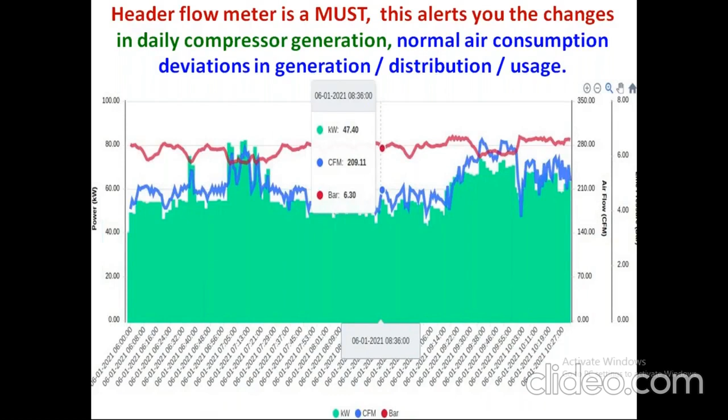This industry was running two 37 kilowatt machines for cleaning purposes. Instead of that, had they gone for a cleaning receiver, the machine kilowatt would not shoot from 40 kilowatt to 80 kilowatt - they would maintain the same 40 kilowatt. The receiver, a 500 liter or 1000 liter receiver, will maintain the flow by itself for the cleaning application. Cleaning application consumes more airflow and has a heavier pressure drop, so the industry has to maintain a cleaning air receiver - it is mandatory.

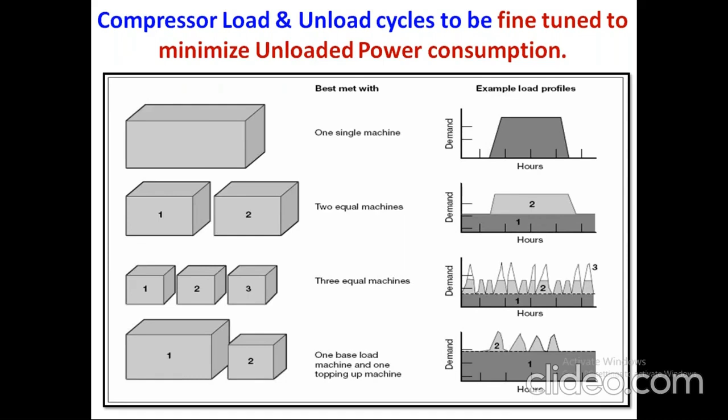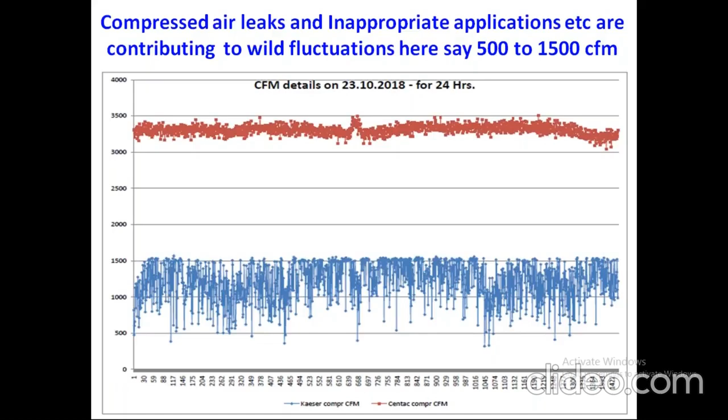In many industries, a decade back, they used this post air cooler - in fact it's a good idea. Instead of having an integrated cooler within the compressor hood, try to have the post air cooler separately. If you want to maintain a deliverable temperature of 40 degrees rather than 45 degrees, a post air cooler will do a better job and reduce the load for the refrigerant dryer. Instead of buying one more refrigerant dryer, just go for a post air cooler - it will maintain the same dryer but improve efficiency and performance excellently.

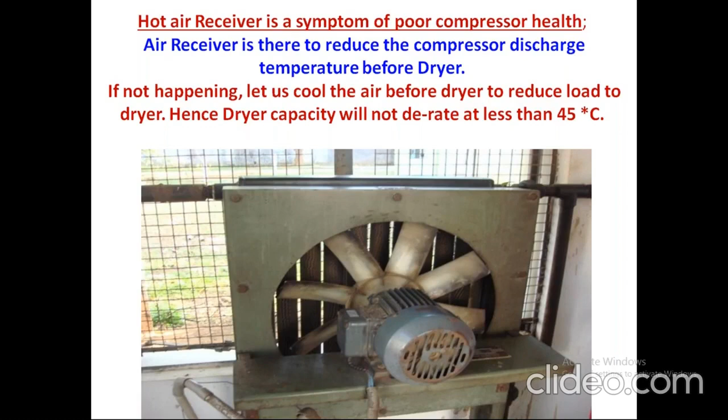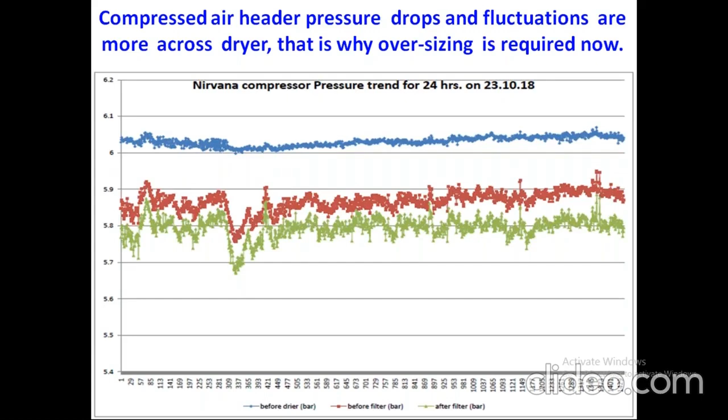The water separator or moisture separator has to be kept near the compressor hood, and that has to be monitored correctly. If the moisture separator is not correctly operating, you will automatically find a loss - an aggravated energy loss in the system.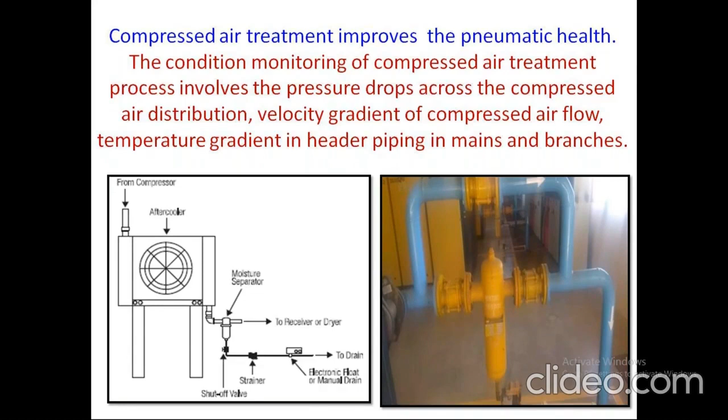Ultimately, this energy monitoring is a just-in-time preparatory measure for the process. It is a retrofit to the existing process.

The condition monitoring route through energy conservation is the key to survival for any given industry. Whatever energy is transmitted end to end, from the EB incoming to the delivery point at the tail end machine, wherever it is obstructed either fully or partly, that is a hotspot - a blockage of energy flow, meaning it is a loss to the industry.

That has to be spotted by the infrared thermal imager only. A hotspot is a symptom of inefficiency, or energy blockage, or energy partly blocked.

Normally, the law of energy conservation says whatever energy is input to the system has to come out as output. Partly it will come as 90% output, and 10% or 20% as loss, and the symptom of that loss is seen only by the hotspots.

So always apply the law of energy conservation when you enter the system: what is input to the system, what is the output from the system, and what is the loss to the system.

This is what we do in the indirect way of energy efficiency calculation for a boiler in the industry, especially on the thermal side. Nagesh Kumar was discussing only the thermal side. On the thermal side, a lot of inputs are not made available to the industry. If that is made available thanks to IoT devices embedded in the thermal system, the thermal system can be much improved, condition monitoring can be done, and the industry can very much improve upon it.

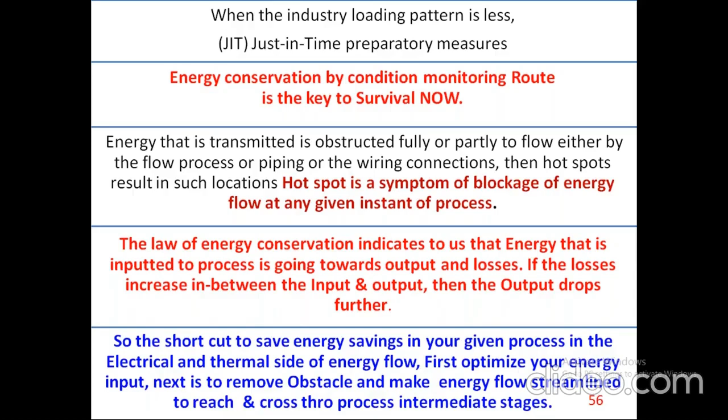All we have to do in the industry is streamline the energy flow - there cannot be any blockage or partial choke in the system. Any blockage in the system, by way of sharp bends or sharp fittings and all, causes almost 30% friction loss. This can be avoided.

A 160 kilowatt machine delivering 1000 CFM delivers almost 1000 liters of water per week when running for 8 hours. If it is running for 24 hours straight, almost 3000 liters of water is delivered.

From this diagram, thanks to the good practice guide - an excellent guide - we can understand the post air cooler delivers the maximum water that is to be removed from the compressed air. So the post air cooler has to work effectively in the compressor, and it is kept inside the compressor hood, not accessible to the operator - that's the irony of it. If the post air cooler is made to work effectively, then the compressor will perform excellently.

Then comes the receiver and the pipe work - what is the water ingress? Then comes the refrigerant dryer. So the water has to be removed in stages: one from the post air cooler, then from the receiver, then from the dryers, and from all the filters also.

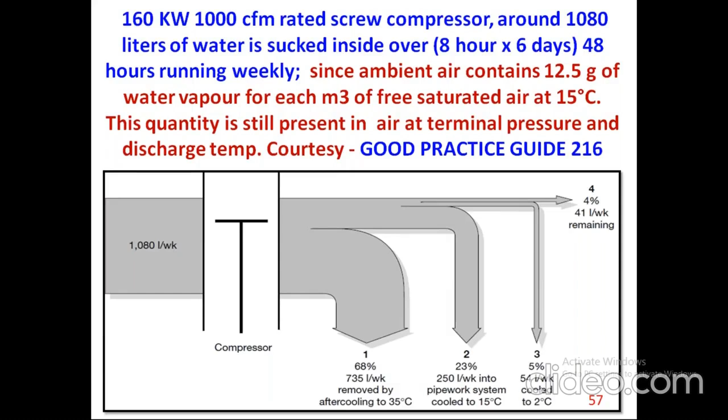Instead of relying on the compressor OEM's red, blue, or band indicator, let us install pressure gauges upstream and downstream of any type of filter or dryer. You know what the rated pressure drop across the dryer is - some industries maintain around 0.2 bar, as I showed before, while some industries have more than 1 bar. That is a big loss to the industry - almost 8% or 10% is lost because of the dryer itself, because of the pressure drop.

Thanks to this industry, these LS mills, we have done an energy audit, 6000 CFM they are consuming, and it's an excellent learning for us. The energy auditor can deliver more of his knowledge to the medium and small scale industry, and he can learn more in large profile industries, large scale industries.

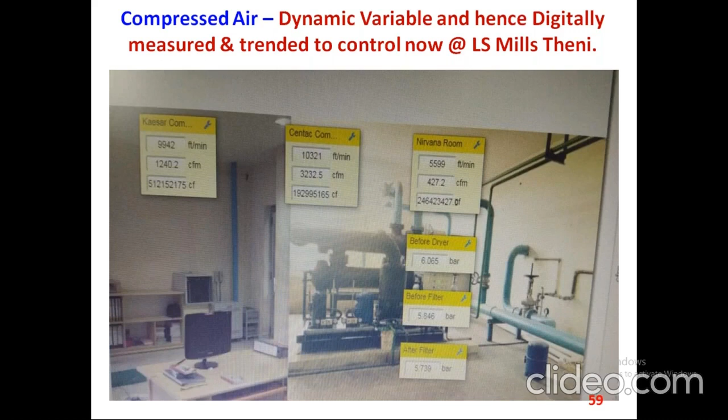This industry, as I was telling before, monitoring the CFM, monitoring the dew point, monitoring the pressure drops across the filters, across the dryers, what is the ambient temperature, ambient RH, everything is monitored. And Systel marketing, Systel compressor, monitoring, they have done these retrofits. It is an excellent showcase study. We always tell, especially in compressed air energy monitoring, by condition monitoring.

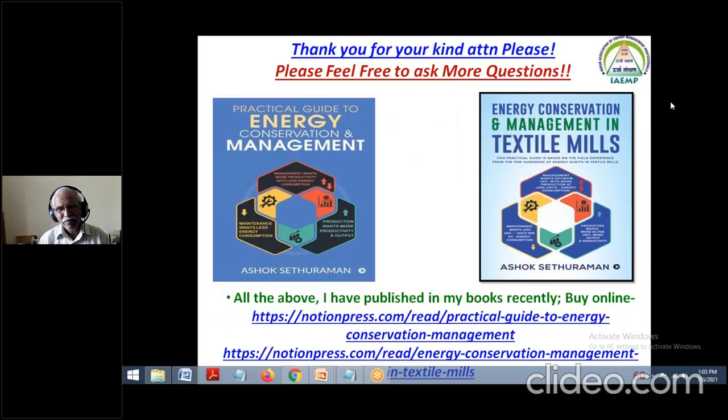You have covered so many parts from the textile portion, even the waste recovery. We came to know how much potential is there in the waste recovery system, and we'll definitely go through that Sudhgirni, and go back again, because we did that audit I think 3 years back in the Sudhgirni. Now with this orientation also we can do some different things, and by that we can achieve around 10-20% at least in 2-3 portions, even the compressor also.

Very nicely elaborated with the case studies, and this could happen only because of the exemplary experience, otherwise it is not possible. And even what you say is very correct, that books are very good, sir.

I also appeal to all the participants, because during a webinar only will one come to know what is happening, what can be done, but one time listening or watching of the webinar is not sufficient. Instead, one can go through the college library, procure this book and keep it there, which would benefit students going for projects, research kind of projects at degree and diploma level, where they can refer to these case studies as a handbook. Both books are very good, very informative and very motivating to do activities in energy conservation as well as audit.

It was really, I'm quite happy with this presentation. Thank you, sir. Thank you.

Thank you so much for giving this opportunity, because as an energy auditor, I appreciate your sense and your feedback, because you are doing energy audits in the field and you know the pulse of an energy auditor. We are always looking for ambitious energy savings for each and every equipment, but the industry is often contented with conservative energy savings. If the industry can change from conservative to ambitious energy savings, it can achieve more than what they have presumed. You are here from the institution, giving a lot of energy audits to the industry. In fact, we are learning from you what we can collectively educate to the industry. Thank you, sir, for your wonderful feedback.